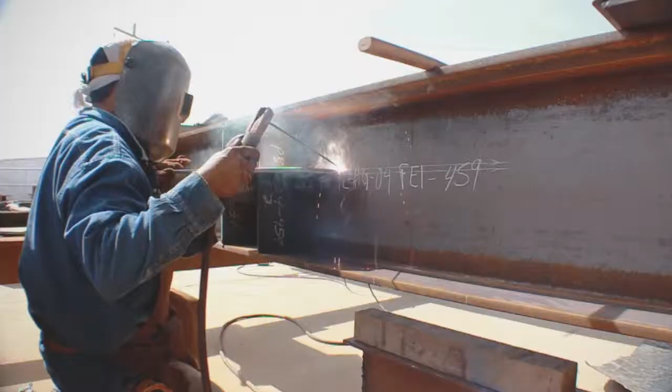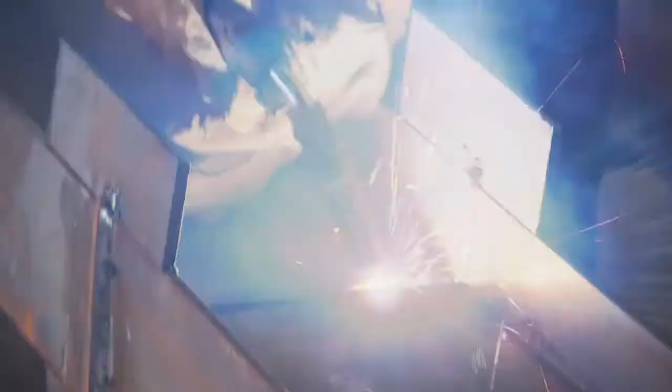ICA Fluor Company played an important role in this project, which hires Constructora ROVASA to provide manufacturing services for embedded manhole covers and some civil work repairs. Subsequently, a new project of CFE in Piedras Negras, Coahuila begins, where also, through ICA Fluor, Constructora ROVASA is invited to participate in the Carbon 2 project by making boots for control valves.

That's how the company gradually developed projects in which Mr. Victor Peralta Vázquez and Romualdo Peralta Vázquez, creators and founders of the company, having close associates, began at a forced march the evolution of the company, resulting in recognition at national level in order to be a leading and competitive company in the international market for its quality work.

Our job: Document Control Department. The delivery process of control copy and information control from the Document Control Department is an essential part of the manufacturing process of our products.

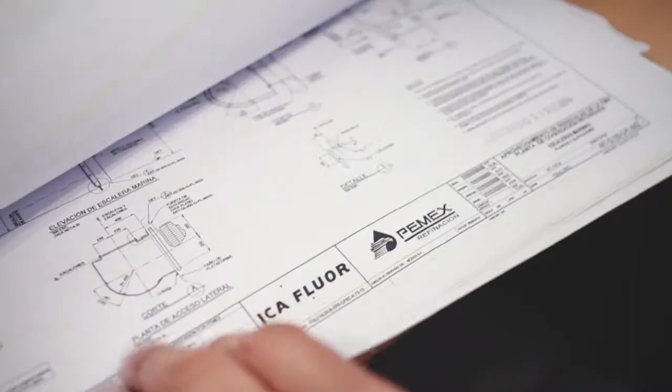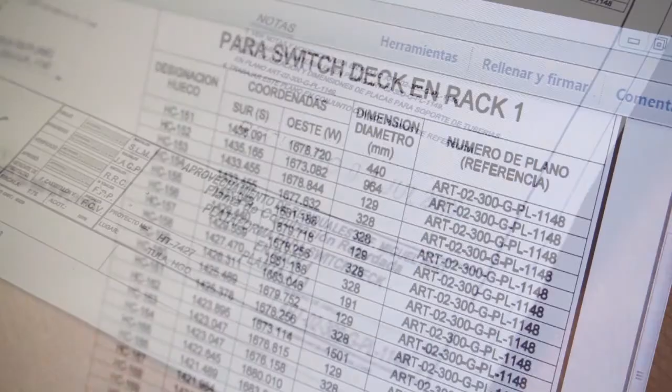Design drawings are received from the customer and delivered to ROVASA Engineering Department. The acknowledgement of receipt to the person designated by each department for information is made, which upon receipt sign acknowledgement of receipt. This is entered into the logbook of document control, electronic folder for projects, reports, master drawings, and the electronic platform client request or work claim.

Engineering. This is the department focused on the design and detailed engineering for the development of manufacturing drawings and assembly of metal structures. We begin with the receipt of manufacturing drawings and documents endorsed by our client, sealed with control copy by the Document Control Department.

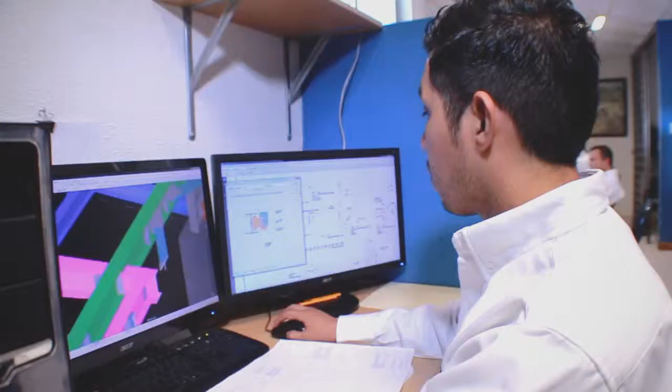Once the requirements are obtained from the customer, through its basic engineering, project planning is carried out to determine their tentative finishing date. The engineering manager of ROVASA, once the project is planned, gives it to a modeler to initiate the development of a structural model, considering specifications, standards, and materials requested by the client.

After being checked and reviewed, we proceed to the development of manufacturing drawings, which must comply with the information necessary to obtain correct manufacturing workshop elements. Manufacturing drawings made by the draftsman have to be approved and reviewed by the engineering manager, subsequently delivered to the Document Control Department, which is responsible for documenting and delivering them to the Production Department.

Production Department. During the manufacture of steel structures, the Production Department receives the approved manufacturing drawings at the Document Control Department. The Chief of Workshop has to designate the manufacturing drawings to trained personnel for manufacturing.

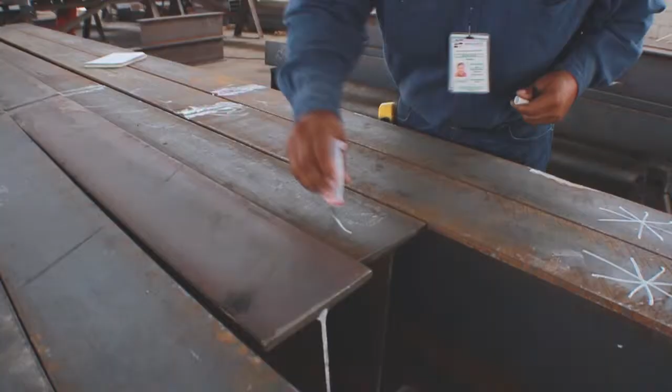Also, the manufacturing drawings, manufacturing personnel, as well as the Chiefs of Workshop will be verified by the area of quality control. Verification is performed before, during, and after the manufacturing process, from receipt of raw material, checking the quality certificates, certificates of compliance, data sheet, etc., up to the check-in for product development, which will take place in the assembly, identification, traceability, and product release to move to the following process.

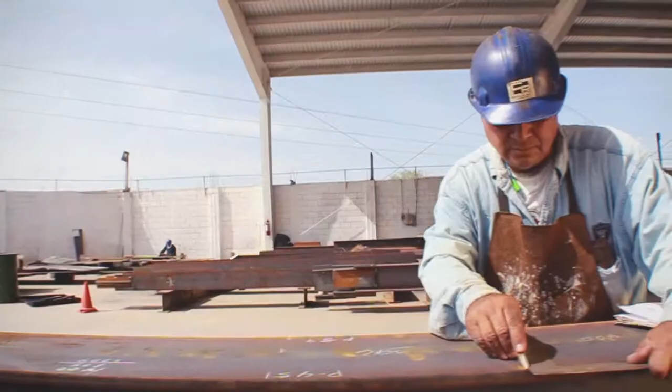Sandblast. The sandblast activity meets quality requirements according to applicable standards and specifications according to customer projects. The main objective of the activity is to fulfill a surface profile through abrasive pressure application to facilitate the addition of the paint, which will delay the process of oxidation of the piece.

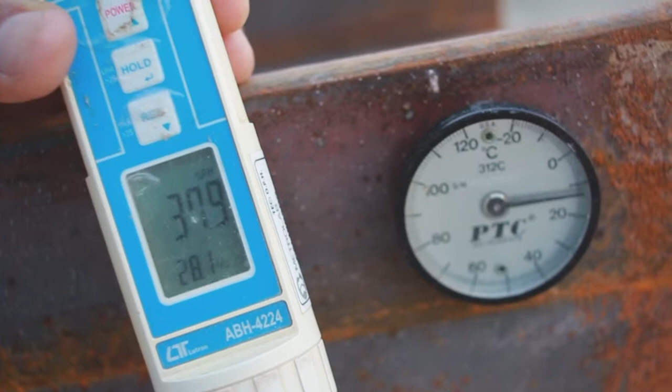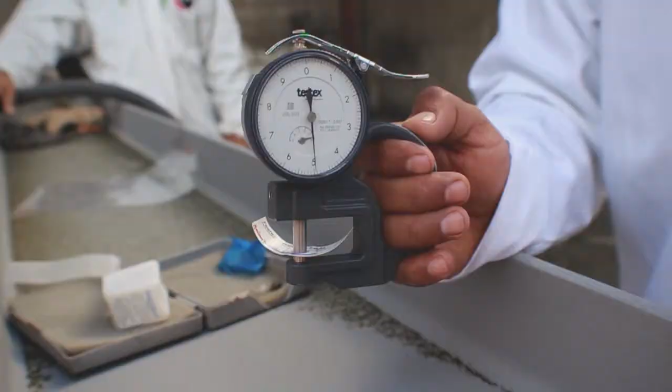Before the start of the activities, environmental conditions have to be checked. They must be favorable for the beginning of the activity, which will be registered in the concerned annex. Also, within quality inspections, verification of measuring instruments and testing is made to verify that they are properly calibrated.

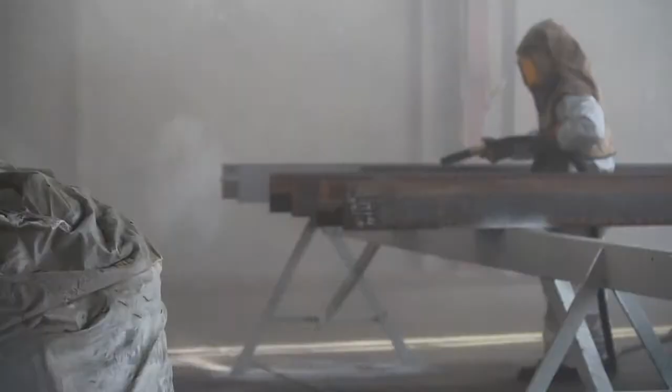Application process of protective coatings.

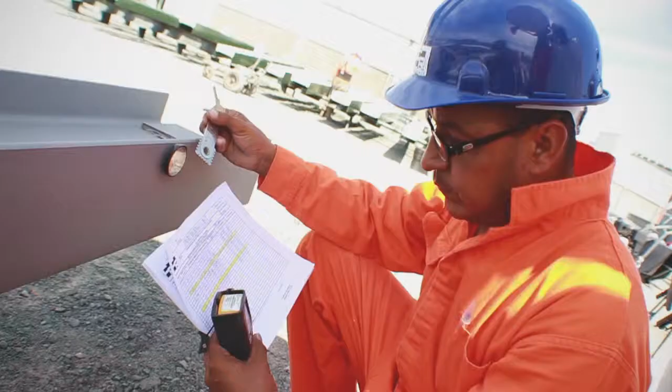Initially, the environmental conditions are verified, making a record of such conditions, which must be optimal to start with the application of protective coatings at different levels: primary, link, and finish.

Likewise, cross-inspection is performed with the production staff, freeing the individual steps of the activity to have a dry film thickness parameter to the point of adhesion test according to method ASTM D3359, with instruments and measurement equipment properly calibrated and current.

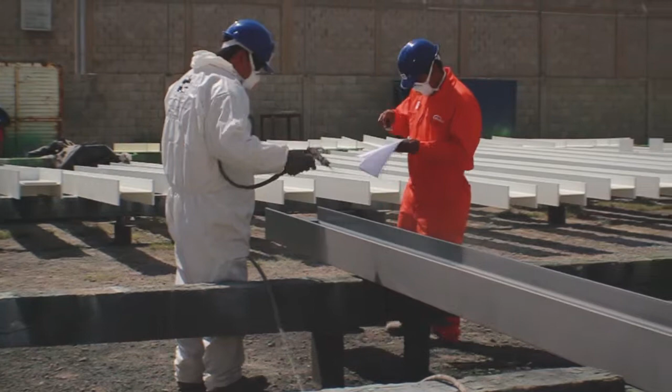During the process, records are derived as evidence of an inspected process, making clear the certification of our protective coatings applicators, as well as our quality inspectors, attached to ISO 9001 standard.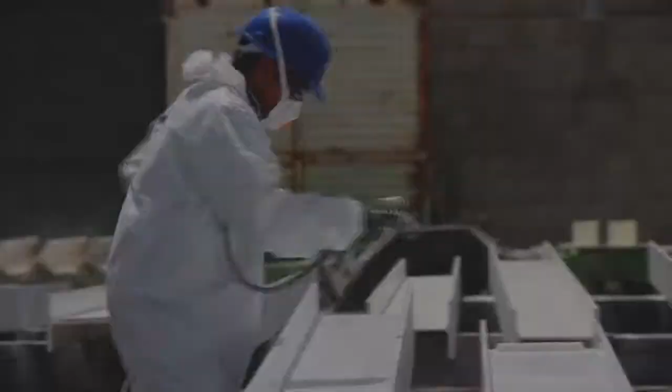According to the procedure, the main objective is the arrangement or stowage of our product sent to the site that will be the place of installation, always taking care that there is no physical damage to the product.

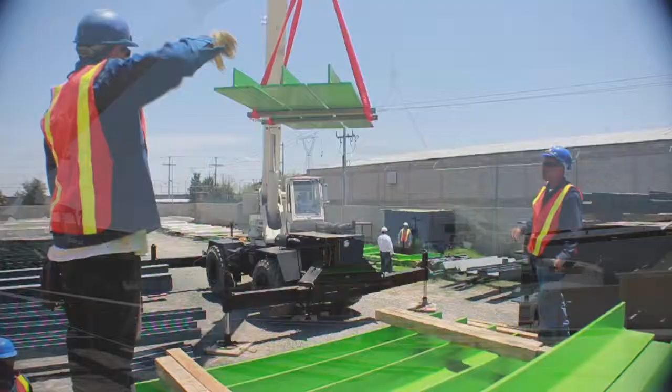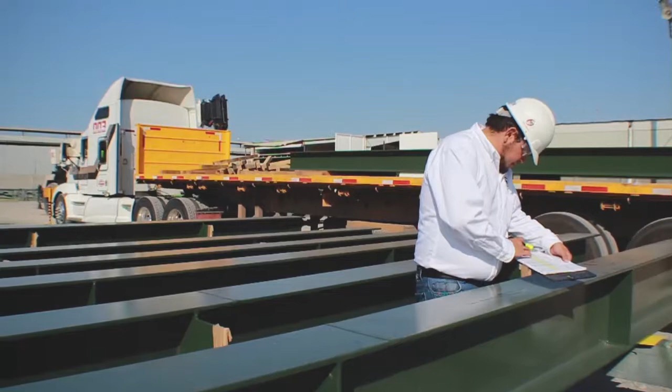To do this, the implements are checked before loading and lifting equipment, from cranes to slings, shackles, bonds, etc., confirming that they are in perfect condition so they can leave for their final destination.

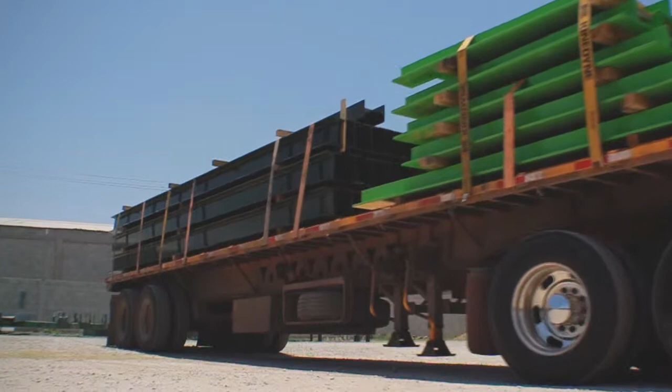The production department delivers a list of the parts manufactured to the quality supervisor for his approval.

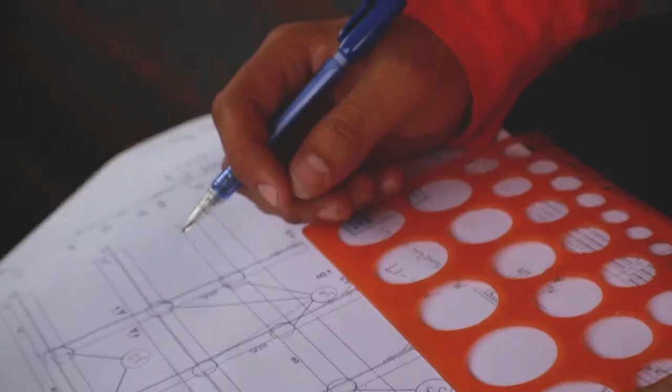For the welding mapping, the quality supervisor observes the welder and does its mapping in the sketch or drawing, writing down the number of union, thickness of welding, and welder key.

The assistant is in charge of assembling the quality dossier in accordance with its procedures and digitizing data provided by the quality supervisor, steel and painting.

The dossier is composed of manufacturing drawings, certificates of materials, report of manufacturing, visual inspection of weld, non-destructive testing, preparation and implementation of anti-corrosion coatings.

So the quality of our products for the customer is guaranteed.

Assembly. Currently we are working on major projects due to the excellent quality of our products. A clear example is the assembly being done in the city of Tula, Hidalgo, as part of the work for ICA Fluor. During assembly, parts are raised according to a method of installing the metal structure.

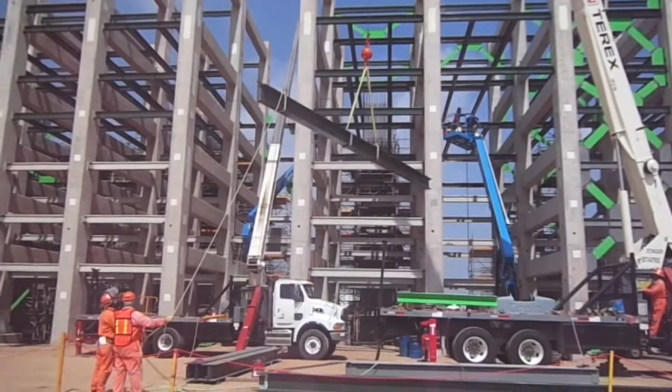Then it is released by the Department of Topography to begin the process of torque or welding. Subsequently, the Department of Quality Control is invited for its release.

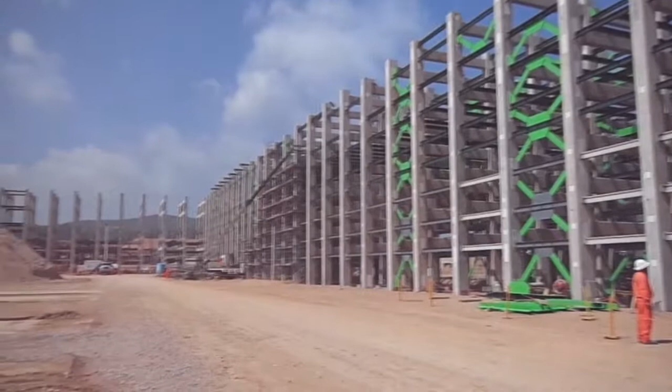Finally, the process of retouching and application of anti-corrosive coating is carried out, which will be released by the customer. It is worth mentioning that there is an attachment or format in all processes to release each of the processes, up to a format of certification for the steel structure.

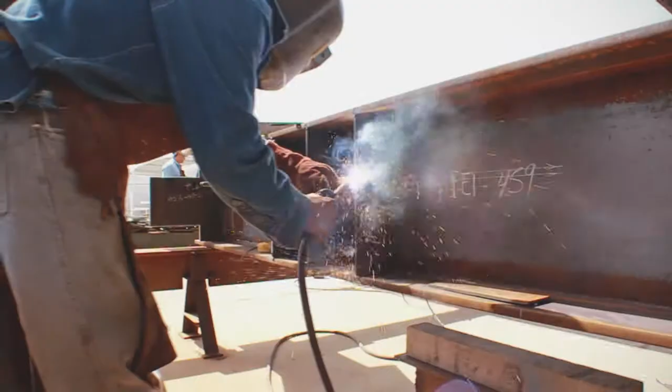In Constructora ROVASA, we are at the forefront. We have a system of quality management which is responsible for documenting, implementing, and continuously improving, always working together with all the departments in our company.

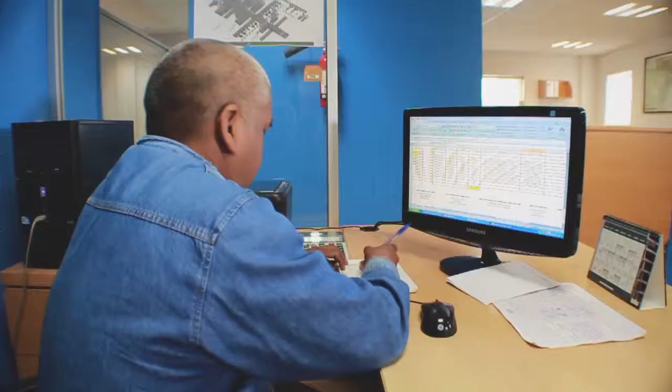Also, our system is based on processes which determine the criteria and methods necessary for the operation and control of these processes to be effective, ensuring the availability of resources and information.

The quality management system helps to direct and control our organization with regard to quality, tracking, measuring when applicable, and analyzing these processes.

We are committed to providing the resources necessary to help meet contractual requirements and satisfy the needs of our customers by delivering quality products.

Also, we are committed to establishing, maintaining, and continually improving our system of quality management. All personnel directly involved with the quality of our services know and support this policy.

More than 20 years manufacturing metallic structures support us.